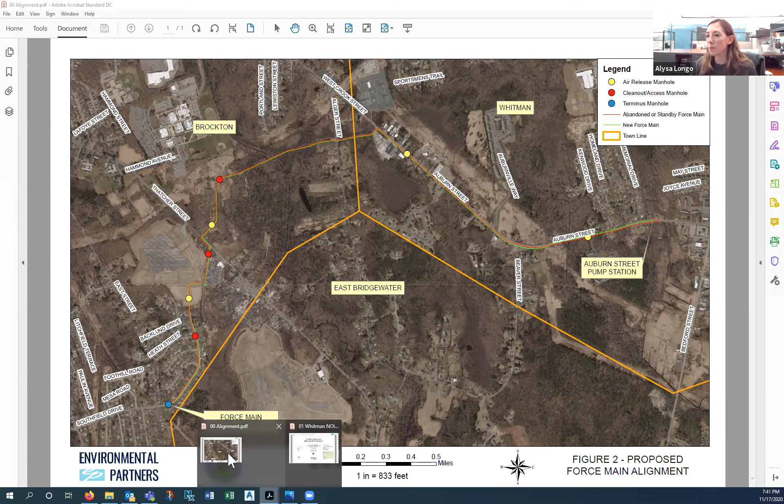So the plans that we submitted show the new force main throughout the roadway. Let me pull this up. It's this dark black line, and it follows the same alignment as the existing pipe. And then right here is where it veers off the road and enters into this wetland area.

We have filter socks proposed throughout the construction, and we're also proposing construction mats for all equipment to use to protect the wetlands.

There's also this small intermittent stream that runs along the force main. In that area, we're proposing to do some horizontal directional drilling beneath the stream so we don't disturb it, versus everywhere else along the alignment, where the plan is just to use open cut excavation and install the force main that way.

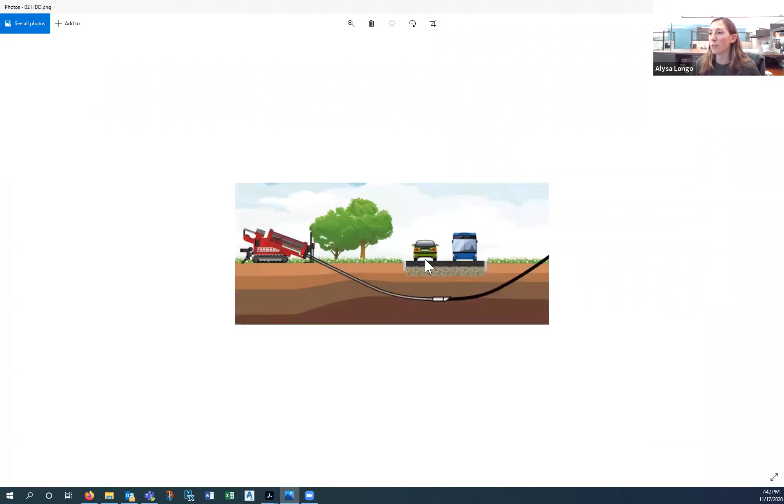This might be a little small for you to see, but this is just a figure depicting the type of directional drilling we're anticipating, where instead of the roadway, this is your intermittent stream, and we can go beneath it without dredging or disturbing the stream.

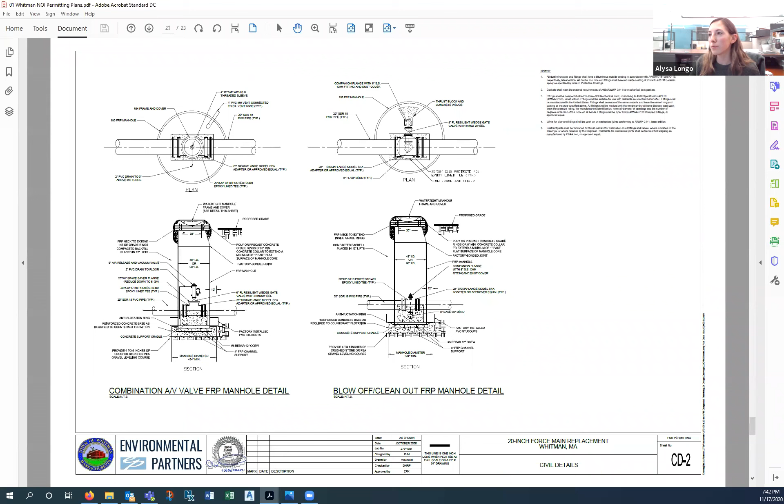Also in the drawings we included some details, like I said, for the filter sock, for the construction matting, for dewatering, and basically how we plan to protect the wetlands during this process.

I guess just to give you an update on where the rest of the permitting stands, we submitted a similar NOI to Brockton, and we'll be presenting this project at a hearing with them tomorrow night. We've also submitted to the Mass Historical Commission.

We submitted a pre-construction notification to the Army Corps, and we also submitted an environmental notification form to MEPA as part of this project. It was determined that the 401 water quality and the Chapter 91 review by DEP were not going to be required based on the resource areas we were disturbing.

So that's just a quick summary of the work we're proposing and the background of how it all started. But if you have any questions, go ahead.

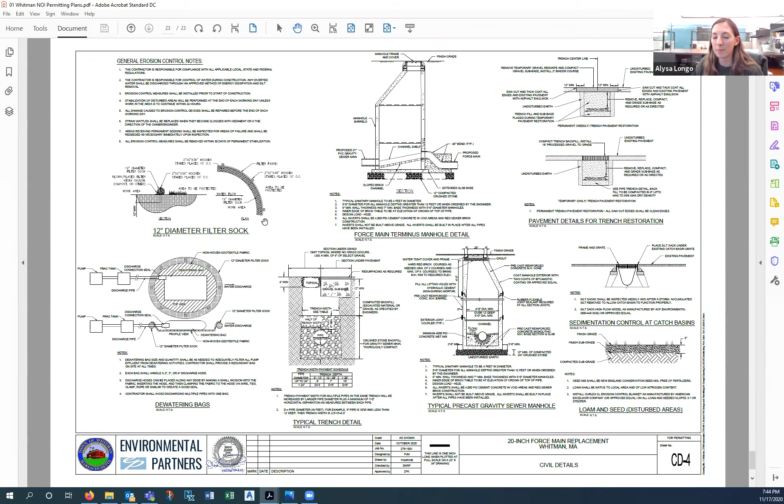Okay, I have a couple of questions. Basically we're more or less concerned with the area of the wetlands and so forth.

But the old pipe, what are you going to do with that?

Yeah, so right now, as part of this project, the pipe is going to remain in place, and the new one will just be installed basically right next to it. And then if the funds are available, the town would like to do some more inspections, some CCTV, and see if we can line the pipe or repair it in place and have that as a bypass option in the future.

Now, the purpose of replacing the pipe, because it's no longer... well, it's leaking. You've got roots and water and everything getting inside.

Now what happens, say in the next 10 or 20 years, that pipe caves in?

The old pipe - what's going to happen to the groundwater table? What's going to happen to the soil around it if it does cave in?

So, like I said, the town is looking to hopefully do some further investigation, and maybe they could line the pipe - that would be like a structural lining that would protect it from collapsing. That would be the plan based on the available budget.

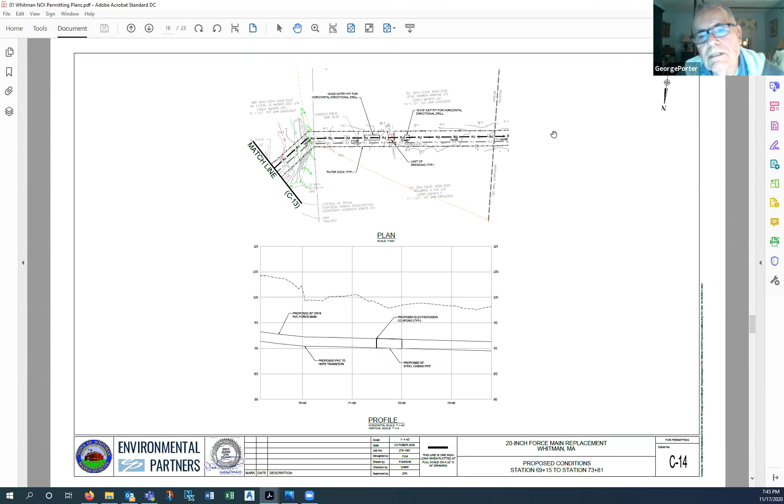How deep is this pipe going to go now? We did include some profile views, and in general we tried to stay about 5 feet below grade.

As part of the work, we'll be installing a few manholes with air release valves or cleanouts at high and low points, but that should match the existing force main pretty much. All the connections and everything will be sealed tight, so water won't come in.

And the fill - do we plan on removing that? In a couple places in Brockton we're concerned there might be some unsuitable fill, but I believe our soil testing in Whitman indicated that everything could be reused with the PVC pipe.

There was some mention about maybe some kind of a path or roadway where a vehicle can drive down there. Are you still thinking about that? At this time we're not, just because that's kind of more of a permanent effect, and the vegetation, the trees and everything would need to go back up again. So I know we had talked in the past about maybe a gravel road or something, but that's not part of the work right now.

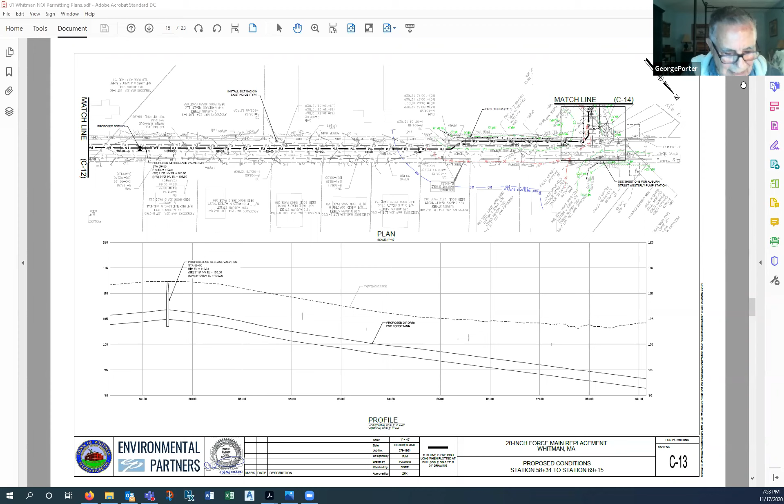That's it for me and for the other members. If there's no more questions on this, it's pretty well laid out what you're going to do, quite a project, so forth, and so I will close the hearing.

Close the hearing. I lost you again. No, she took her map down. So we're all showing now. But for some reason, whenever a change happens in Zoom, he loses the window. George, your screen went blank. Do what you did the last time, click go to the search bar, go to the magnifying glass, and type in Zoom, then click the Zoom app.

Here we go, okay, I see you Alysa, you're still there. We didn't go away, George. Yeah, there's Carrie and Mark Ledger, who's on the phone. We're here, George, how you doing? I'm doing fine, you guys have any questions? Not about this, I'm asking about the next meeting. Oh, the next hearing, sorry about that. My bad, just didn't know. Technology's got me going. Well, you're not the only one. If it wasn't for Ryan... and everybody, it's a learning process for everybody.